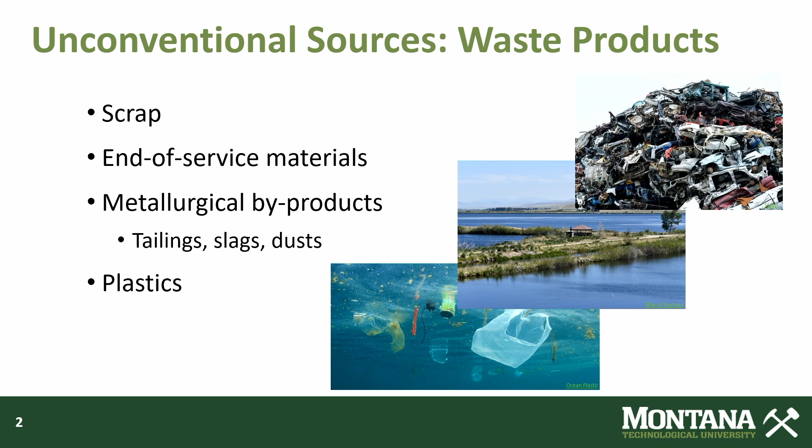So millions of tons of waste products are produced annually and can be toxic to the environment, humans, and ecosystems. Also, storage of these wastes can be difficult with limited space availability, and they also can have the potential for leaching toxins. By recycling materials, we can kind of shift a little bit of focus from needing to mine for these resources to using readily available waste products. And also by recycling, we can reduce environmental impacts caused by generation and storage of these waste products.

Proposed strategies for waste utilization have not been widely adopted because they are not economic and or do not have sufficient political or economic or environmental incentive to implement. Many of the technologies are also energy intensive and have high carbon emissions. Our ultimate goal is the transformation of legacy wastes into value-added products, especially concerning the critical minerals and rare earth elements.

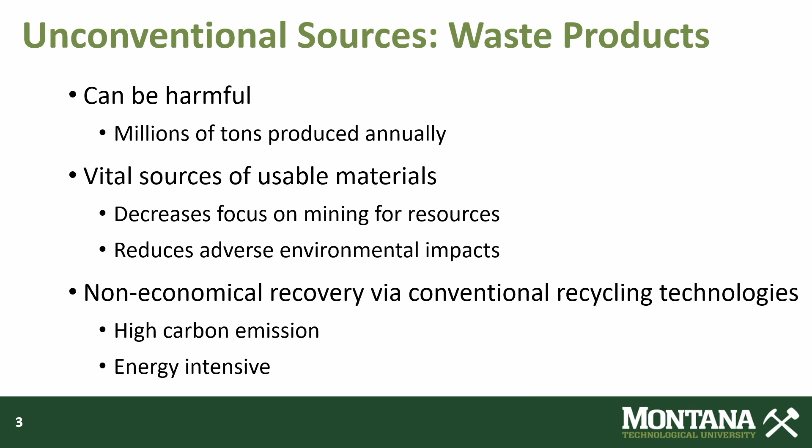So with the shift to clean energy technologies such as solar plants, wind farms, electric vehicles, and drones, the demand for materials, especially these critical minerals and REEs, will drastically increase, possibly triple by 2035 for rare earth elements. And additionally, nearly all CMs and REEs are imported, therefore development of technologies to help recycle and recover these materials is of great importance to material security for the U.S.

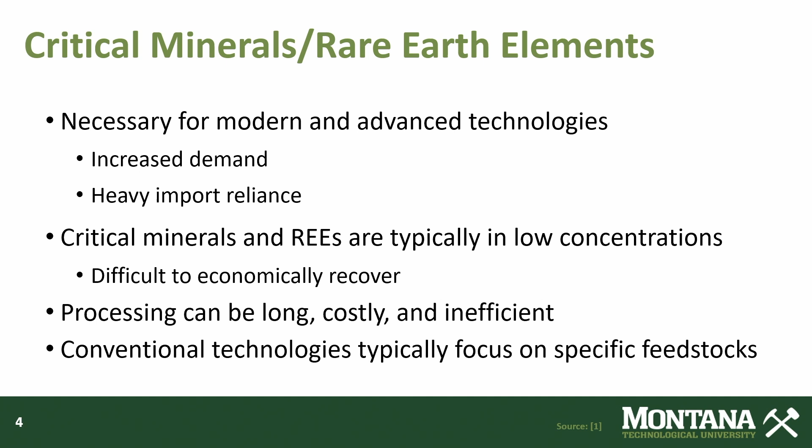So many times the critical minerals and REEs are in low concentrations. We're looking at like parts per billion. Therefore, they're not really economical to recover using conventional technologies. And these technologies a lot of times have long processing times, are costly and inefficient. A lot of times you'll have to do like 100 steps to get a purified product, especially for REEs. And conventional technologies also look at specific types of feedstocks, since they can drastically change in chemical and physical characteristics depending on where they were sourced from and how they were processed.

So the Energy Act of 2020 defines a critical mineral as a non-fuel mineral or a material essential to the economic or national security of the U.S., and which has a supply chain vulnerable to disruption. Recovery of these materials from geogenic and anthropogenic sources is crucial to being able to sustain the production of items that use CMs, such as antimony in lead-acid batteries, lithium and manganese, which are used in chargeable and rechargeable batteries.

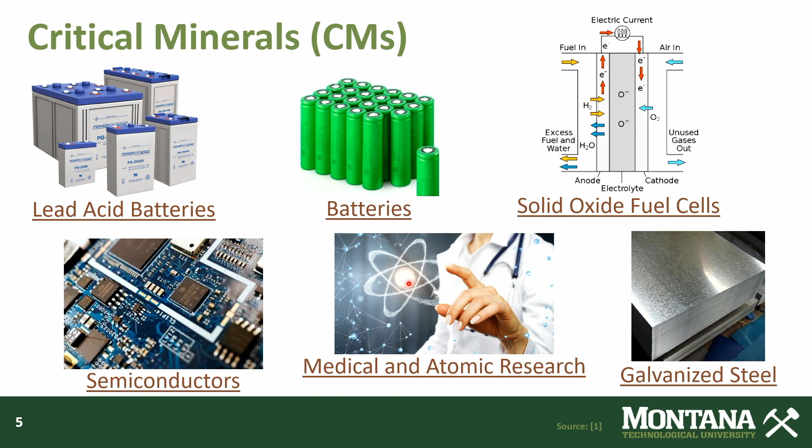Scandium is used in solid oxide fuel cells. We also have arsenic, gallium, and rubidium used in semiconductors and electronics. Bismuth is used a lot in the medical and atomic research fields. And then we have zinc in galvanized steel. So the rare earths have gotten a lot of traction recently and are used in a lot of current technologies with applications in catalytic converters with cerium, lasers with terbium and ytterbium, neodymium and dysprosium magnets are very common and useful. We've got lanthanum-based ceramics.

In airplane engines, we've got praseodymium, and then gadolinium is used as an MRI contrast. So there's a lot of useful applications for REEs and CMs, which is why we're all concerned about them nowadays and would like to make sure we have a constant supply of those.

So one of the processes that we'll be talking about today, this was sponsored by the DOE EPSCoR, and we're looking at recovery of metals from metallurgical slags. So we'll take a brief look at slags. Slags are byproducts of smelting iron, copper, lead, nickel, and other metal-containing ores and concentrates and recycled metals. And while not classified as hazardous by the EPA, it is possible that some hazardous materials and metals could leach out of these slags. We'll get to this slide a little bit later, but slags can also contain many critical and useful metals, and I'll go over a few of those.

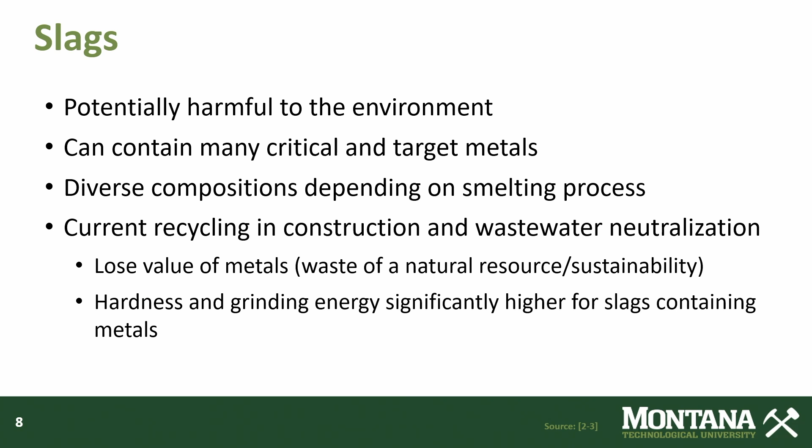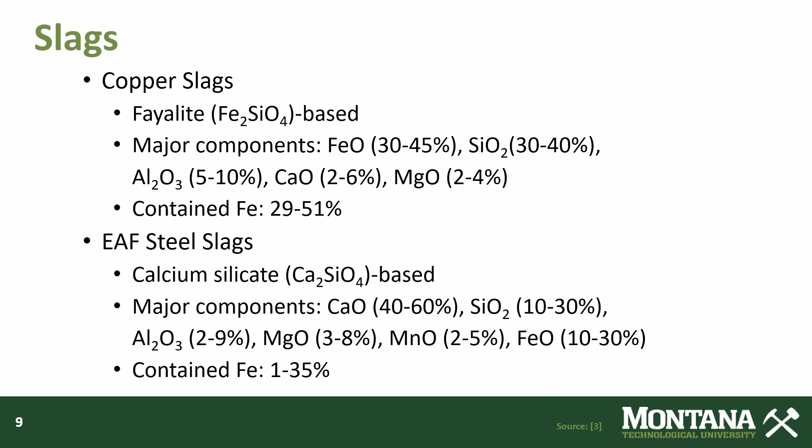So two of the most common waste slags are copper and steel slags. Copper slag is a fayalite slag and EAF slag is a calcium silicate slag, and these slags act as repositories for impurities, and some of the impurities contain toxic or hazardous materials, which is why they can be an environmental concern. We can clearly see a wide range of components that make up these slags due to the varying feedstocks, initial feedstocks, and processing operations.

So what are some high-value materials in waste slags? For copper slags, there's obviously copper, and we use that in electrical equipment and construction. We've got zinc used in galvanized steel. Cobalt is used in rechargeable batteries and superalloys, iron in steelmaking applications, and then molybdenum in thermocouples and cathodes.

Also in the EAF slags, we have some iron and moly again, along with chromium, which is used in alloys such as Inconel, vanadium, which is used in surgical tools, manganese, which is used in steelmaking and could be used for railways, and then nickel, which again is another stainless steel alloy additive and is used in different applications such as the Chrysler Building.

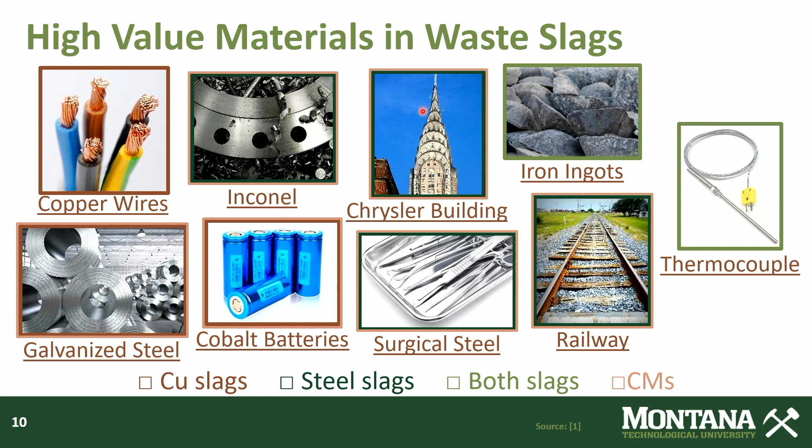So in addition to slags, this process also looks at waste plastics. The four probably most common waste plastics are HDPE, LDPE, PET, and PP. In the last 10 years, more plastic has been produced than in the previous century, with 8 to 10 million metric tons entering the ocean each year, and 80% of the marine pollution is this plastic waste. Of that 80%, 49% of that pollution are single-use plastics, like straws and bags and that sort of thing. And out of all this plastic ending up in the ocean, only about 10% of plastics are actually being recycled.

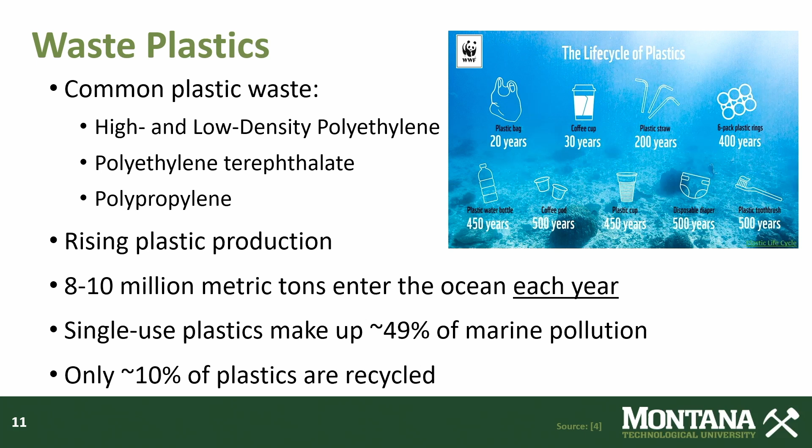So, what are we going to do with the plastic? Well, we're going to pyrolyze it. We're looking at cold plasma or non-thermal plasma, which has extremely fast kinetics and optimum heat generation with a high degree of energy efficiency. Non-thermal plasmas range from room temperature to over 2500 C compared to thermal plasmas, which are about 6,000 to 8,000 C. And plastics pyrolyze at only 600 to 900 C, so we don't really need to use the thermal plasmas for this process. And the plastic pyrolysis can generate 3 products.

We can get pyrolysis oil, which is an intermediary step to produce fuels, but it does add an additional cost because it has to go through a distillation process to obtain the oil. We can get carbon black, which is used as a reinforcement in tire and rubber products, as well as an additive in plastics, paints, and inks. And what we're really looking at is syngas for our application. Syngas is used in smelt reduction technologies to produce molten iron and direct reduction of iron from iron ore processing. And the nice thing about using pyrolysis to do this is that we don't have to use coal or natural gas to generate this syngas.

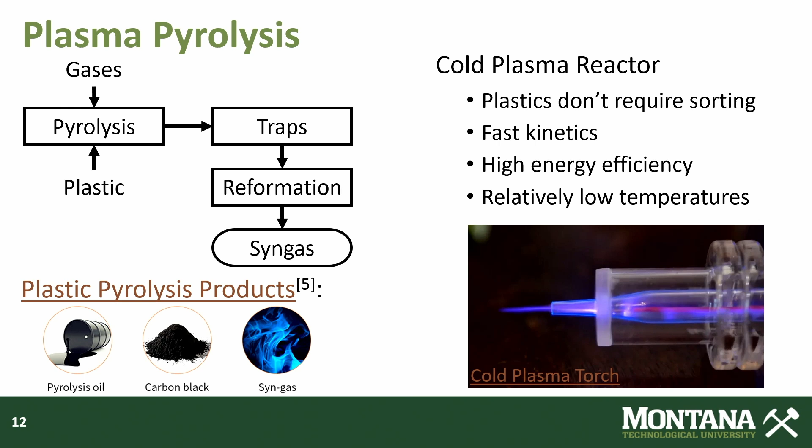So here's our overall process. So it's a gas-based reduction. Slag is heated to an elevated temperature under an inert atmosphere. And then, once we hit our target temperature, we'll add in our reducing gases. And then we're going to cool it down along with the gases and the inert gas to make sure we don't reoxidize any of those metals that we processed.

And then after reduction, the metal phase can be separated from our slag phase, and the slag phase can then be used in the construction sector, assuming we've removed all of the valuable metals from it. And then our metal phase will go through a refining process to obtain pig iron and critical metals, and then that pig iron can be used in the steel making process.

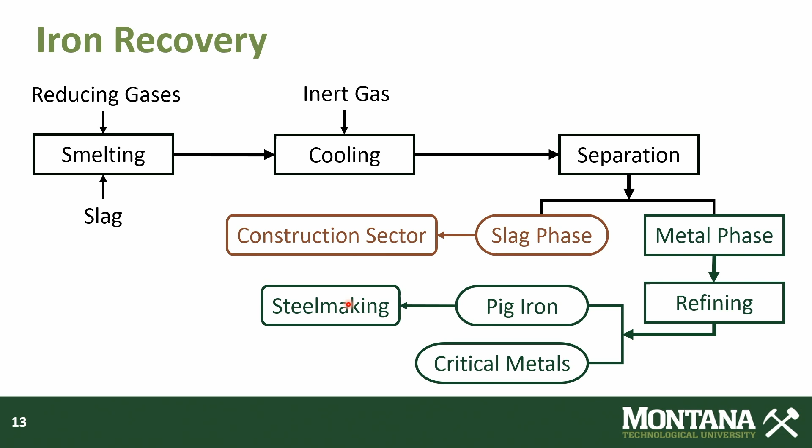So some product applications for this process. The final slag can be used in a variety of applications without the loss of metal, such as the construction sector. The recovered iron can be used in steel making. The critical minerals can be used in many different fields for different applications, including rechargeable batteries, superalloys, and cathodes.

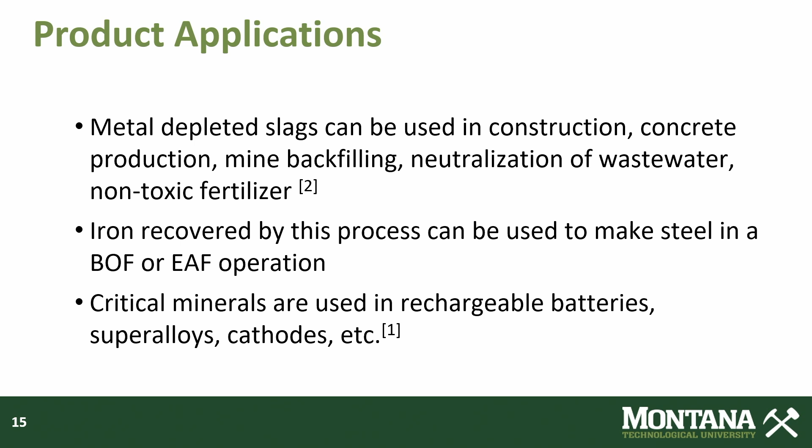Actually, this is a sequel. About 2 years ago, when we first were funded for this project, a group of us from Montana Tech came to explain what our hopes, claims, and aspirations for this particular project are. And so I'm going to give you an update. As Tegan mentioned, a lot of the work that we're doing now is cutting edge. We're hoping to get a good IP and patent position on it. So forgive us if it might not be as technically satisfying as you might hope, but I'll do my best to convey what's going on.

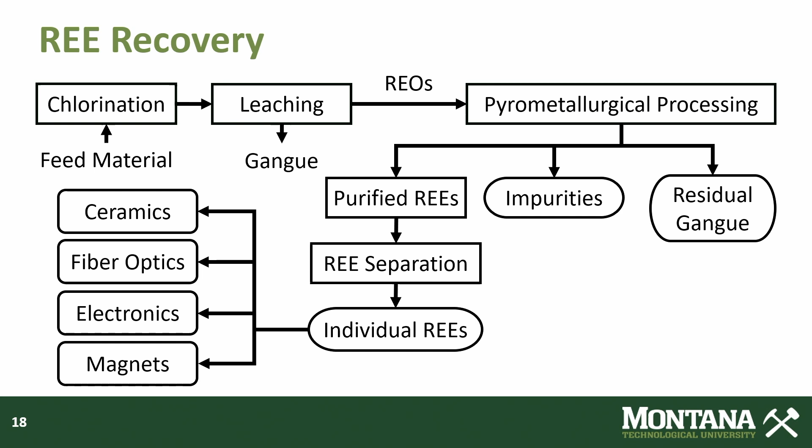Okay, so the chlorination and leaching, I've got a couple of slides on that. Essentially what we're doing is we're blending our rare earth ore or concentrate. It almost works equally well. We can do whole ore roasting. The problem is it's not as economically attractive to treat a lot of ore than a little bit of concentrate. So we blend that then with a reagent, ammonium chloride, a substantial excess of ammonium chloride, which is in the reaction down below there, the NH4Cl.

Put that in a reactor, add some heat, rotate the reactor to get good solid-to-solid contact. And what happens is we're going to produce the rare earth chlorides. We'll have some gangue constituents present. And then, of course, we're going to have an off-gas that's going to contain appreciable quantities of ammonia because of the excess ammonium chloride that we add. And also ammonia is not consumed in the reaction itself. It's just released as a byproduct. Some hydrochloric acid gas, H2O, and then also some carbon dioxide is shown in the reaction below.

So the key part is the rare earth element chlorides. What's neat about those is they're highly soluble in just plain old water. So we can do a simple water leach and get very high extraction efficiencies, meaning that a high percentage of the rare earth chlorides are going to enter solution. Hopefully we can minimize the amount of gangue and other constituents. That's something we're analyzing right now. We do know that we're going to have an iron issue, and that's going to be something we'll deal with downstream.

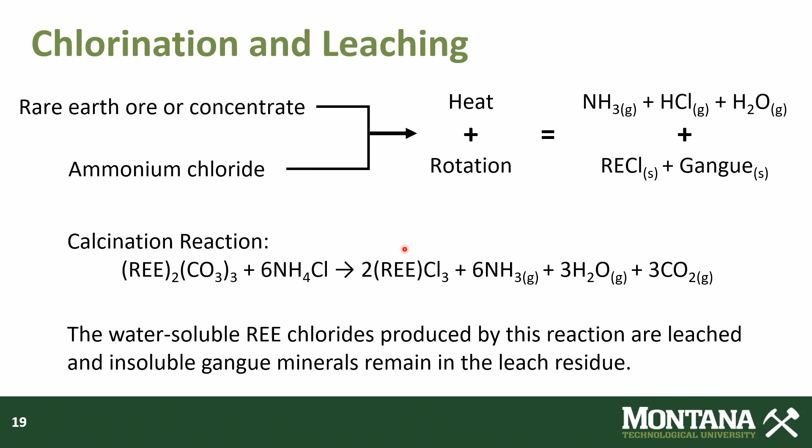Okay, so here's a couple of photographs. The photograph at left, the rotary calciner, is a Thermcraft batch calciner. This is what we've been using to elevate the temperature to about 300, 330 degrees Celsius to get the chemical reaction that we desire to take place. And actually these two units are close coupled. These are the same window, so they're close coupled when we're in operation. So this is where the off-gas reports.

This is an absorption tower. We do a lot of adsorption work too, so that's why I'm kind of tongue-tied on that. But this is an absorption tower, so we're just recirculating a stream of water from the reservoir down below up to the top. It percolates down through this packing, and it effectively captures the ammonia and the chloride. So what we can do is take the ammonium chloride, crystallize it, and then return it, because we have to use an excess of ammonium chloride. So this is an economic measure more than anything else.

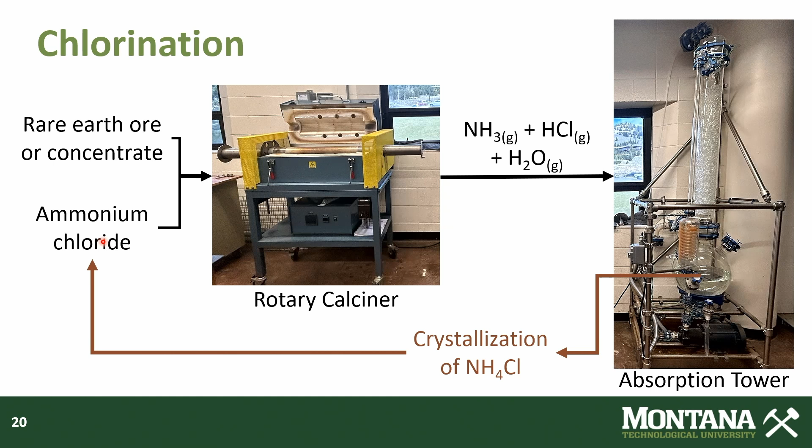One other thing I'll point out, if we're dealing with a concentrate, it's difficult, as some of you may appreciate, to effectively concentrate rare earth elements. So maybe you're going to get a 50% recovery through a physical concentration method. If that goes to conventional hydrometallurgy, you might recover 50% more of the rare earth elements. So the mathematicians in the crowd will understand that means we're wasting 75% of the rare earth elements that have been mined. So that's one of the things that we're trying to get away from here.

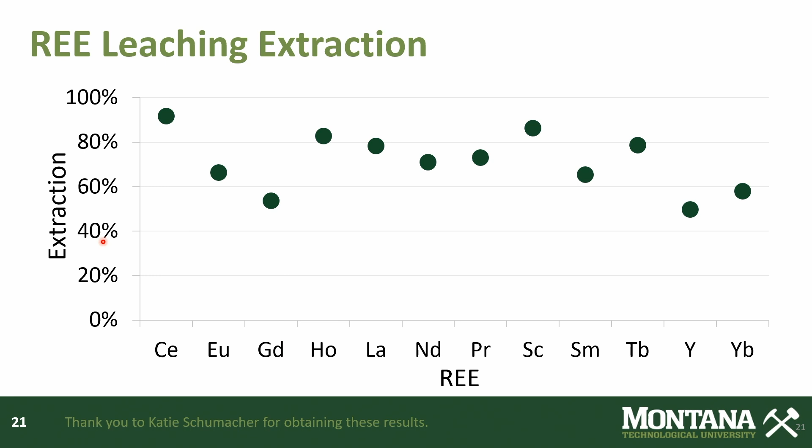Now, last couple of points on this. If you look at the cerium in the first element there, that's the highest concentration in this particular sample. It's present at about 10% in the sample we've got. So that's really the most representative of the extraction efficiencies. Some of these other elements are present at well under 1%. So you can appreciate if you've got a residual of maybe 0.04, 0.02%, you're going to show a little bit lower extraction efficiency than if you had a higher concentrate grade. So that's the reason for the variability in the extraction efficiencies.

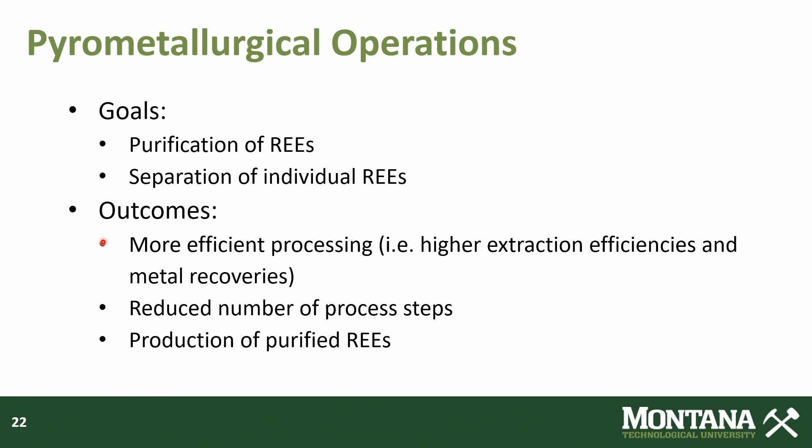Some of the outcomes already realized: higher extraction efficiencies and metal recoveries in the roasting and leaching step. We can dramatically reduce the number of processing steps necessary in order to recover and separate the rare earth elements. And again, I've already talked a little bit about the production of the purified REEs.

So looking forward, we've been working with surrogates and a source sample. We're looking for alternative feedstocks. We want to be sure that this works on a variety of mineral concentrates. We want to look at scrap, anything else that has an appreciable rare earth content that we can bring back into the process. And we'll also look at maybe some other critical metals that might be effectively recovered through a similar process.

Scaling, I may have mentioned it. We're planning to convert that Thermcraft rotary calciner into a Thermcraft auger reactor. That'll enable us to operate on a continuous basis. So we're going to go from gram quantities to kilogram quantities of product, showing that it can be effectively scaled, and also determine the optimal ranges for the various process parameters. You want a very robust process. So if there's operational upsets, you can recover quickly without loss of efficiency.

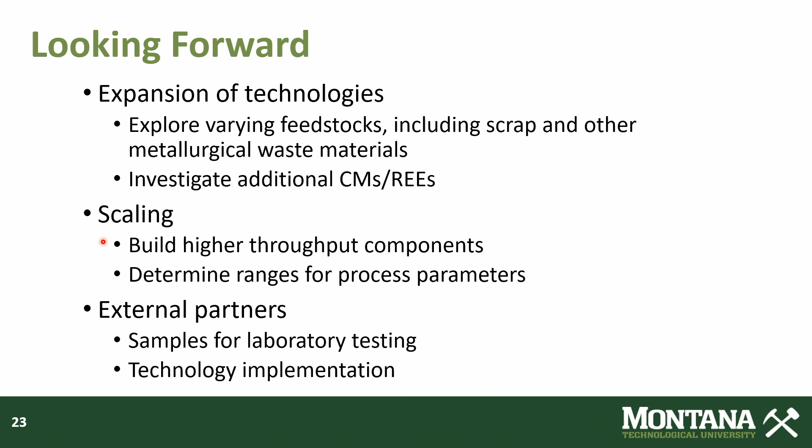We're also looking for external partners and samples. That's I guess what my plea is. If you know of anyone who has access to rare earth element bearing materials, please put them in contact with us. We'd love to get some samples and see how our technology responds to it. And then last but not least, the implementation of that technology.